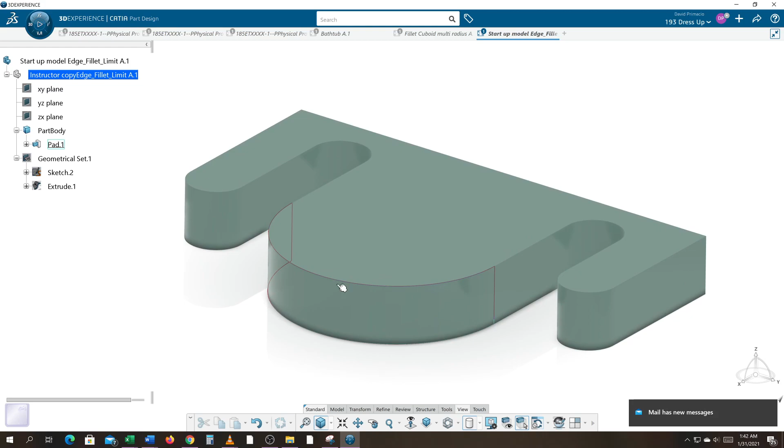So we've got a startup model already. Did you try to pull everything out of hide? Always expand your tree so you can see everything. Now this surface is right there—it's been hidden from you to see if you can figure out how to get that fillet to trim to that surface. But before I do that...

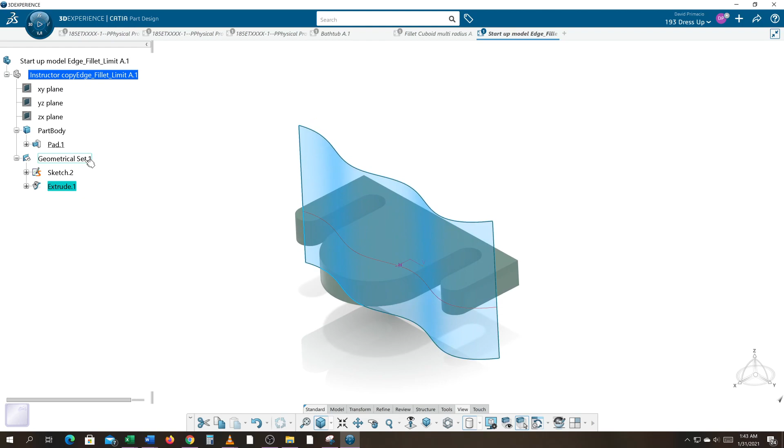I'm going to do some holes. So under model we have the hole feature. I'm going to select this edge out here and then this face. Anywhere on that face it'll snap it concentric to that edge, meaning it will share the same center point.

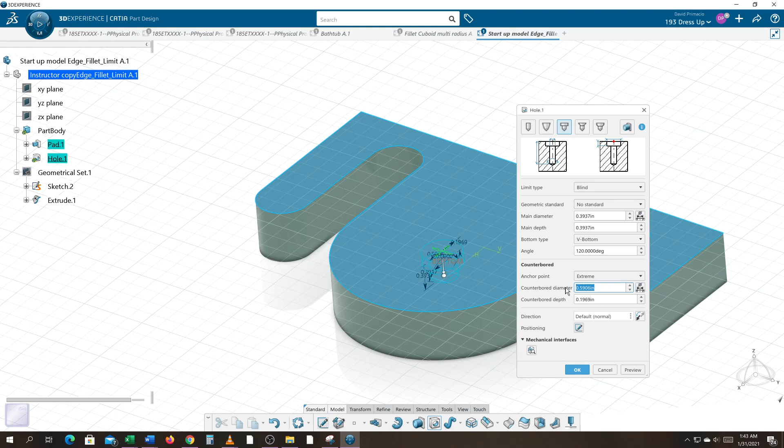I'm going to use counterbore to do a spot face, and we'll make the main diameter 1 inch. The counterbore—I went too big. Oh, the counterbore's got to be bigger first. Let's go 2 and just see how big that is. Yeah, that's good enough, and 1, just so we can see what's going on here.

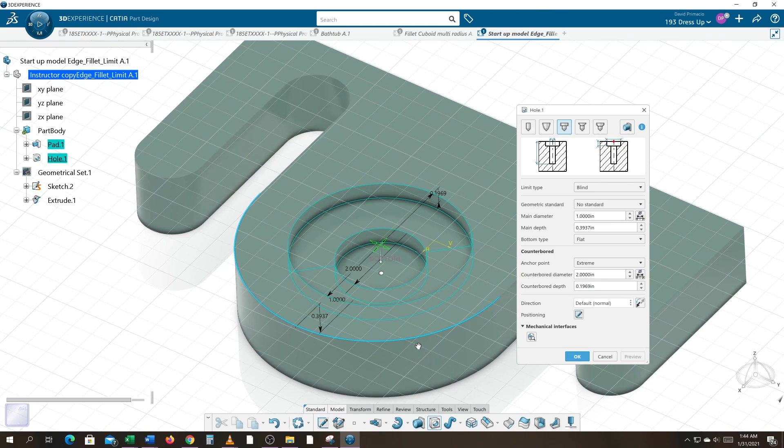Alright, so that hole has a V in it because we have it set to V bottom, and we're going to change it to a flat bottom. Preview that. Okay, I just made that so it would be easier to see that hole. I'll come up with a different color just to make that a little easier to see.

Okay, so you have the counterbore, which is the outside diameter, and then the through hole here. And again, to make concentric holes, you use the hole command.

Grab this edge that's closest to the face, and then grab anywhere on that face. It'll snap it to go concentric. It remembers the last parameter, so we're going to have to go quite a bit smaller.

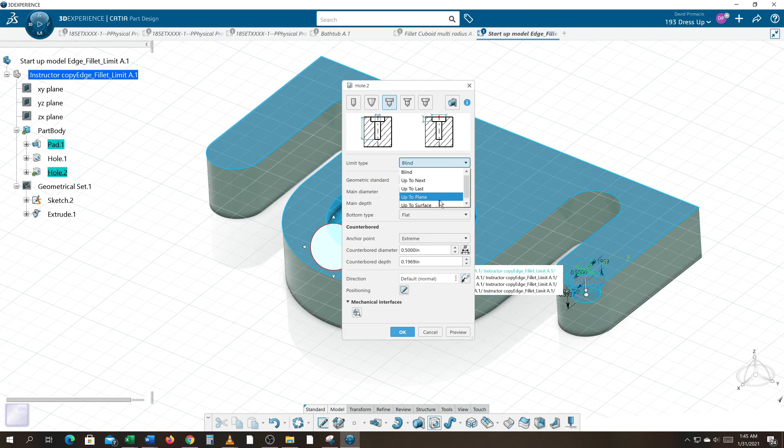Let's try a 1/2 inch—and that's still going to be too big. How about 3/8? And how about a 1/2 inch here? And we'll go through. So we say up to last, and that drills that hole all the way through.

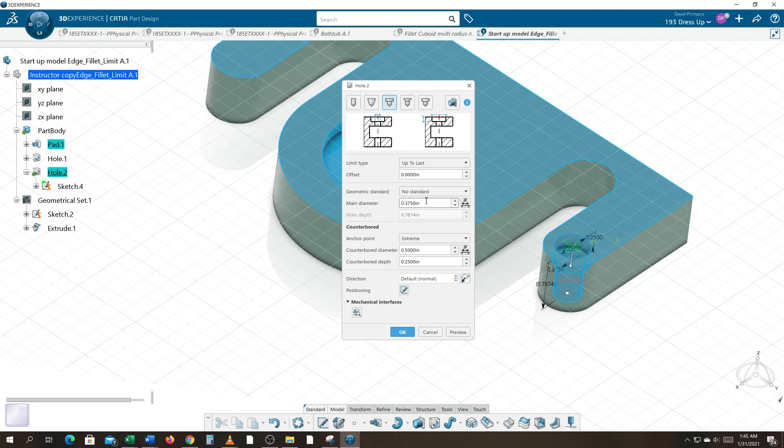What the heck did I do? Let's double click that hole. Counterbore depth—let's go 0.25, and we're doing it up to last.

So that's what your counterbore is going to look like. Probably got a better visual of it sitting there with it highlighted. So that's what your counterbore looks like. Maybe I can sneak this up.

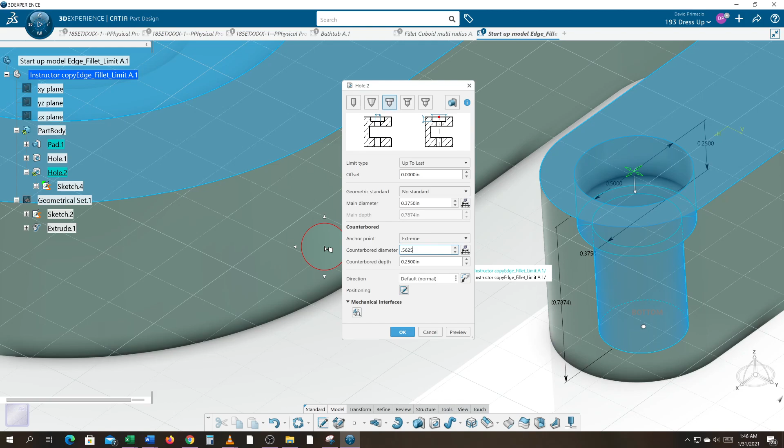Let's try 9/16—0.5625. Preview that, select OK. And there's your counterbore hole versus the countersunk hole.

Again, using this circle and grabbing the edge on the front, not the face but the edge, anywhere on this face will automatically find the concentricity of that arc I chose, and we will use countersunk this time.

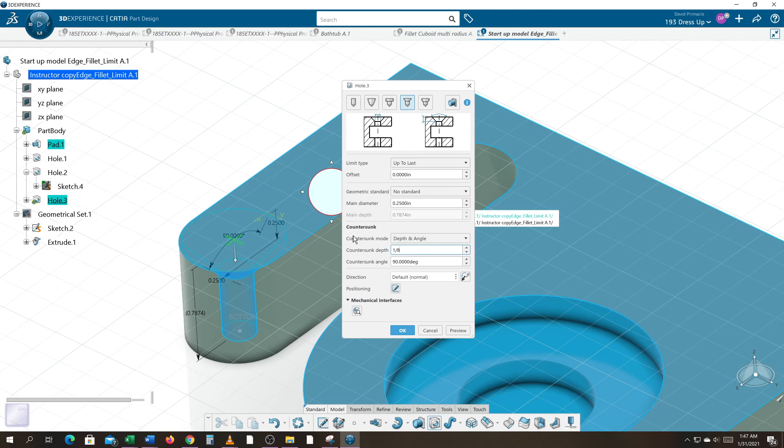Under the countersunk, might have to change that a little bit. Let's do a main hole of 1/4 inch, and maybe not so deep—we'll go 1/8 of an inch deep. Preview that, and there's your countersunk hole. Select OK.

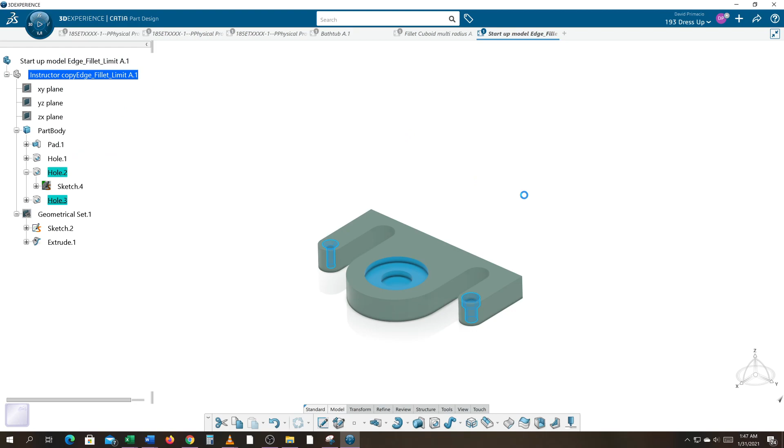And let's make all the holes a different color for visualization here.

Okay, so creating this spot face is kind of deep. Let's maybe change that depth to 1/32.

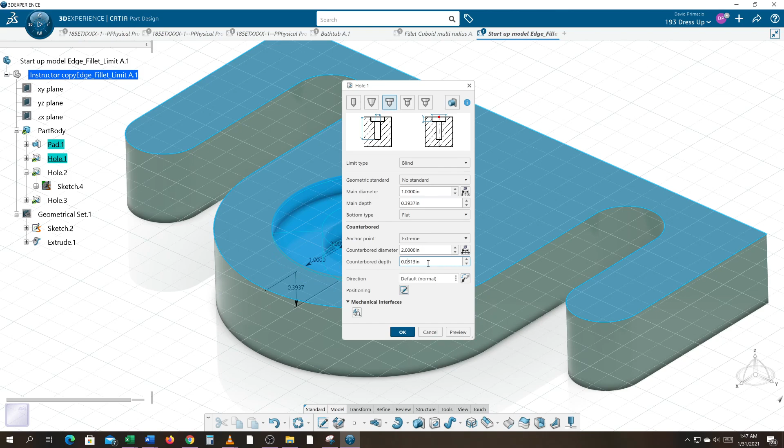Alright, so those are examples of how you can create some counterbore and countersunk holes. And now for the grand finale, the fillets.

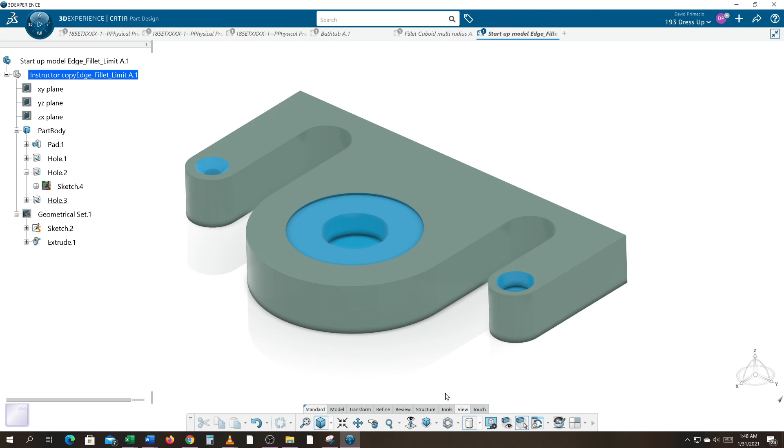Under View, Fillets—or sorry, Refine Fillets. If I select this top edge and hit Preview, let's go 0.1875 and hit Tab. If I preview that...

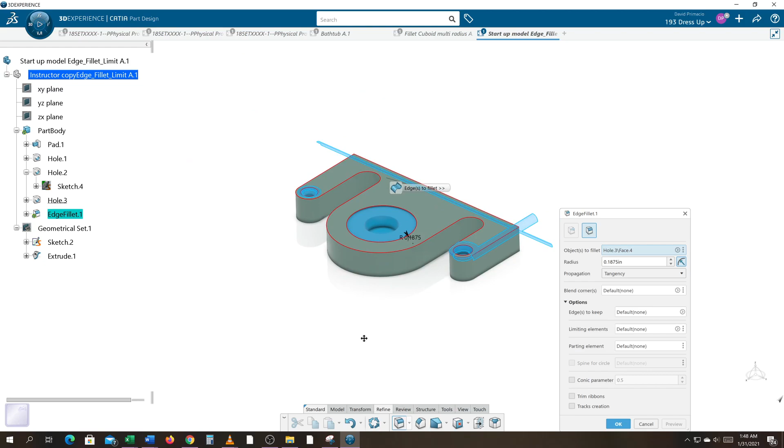It's kind of hard to see what's going to happen. I'll just say OK, and it's not going to like it because it's trying to do a fillet on every edge. I must have had the face chosen. So as it says right here, the whole face has been chosen.

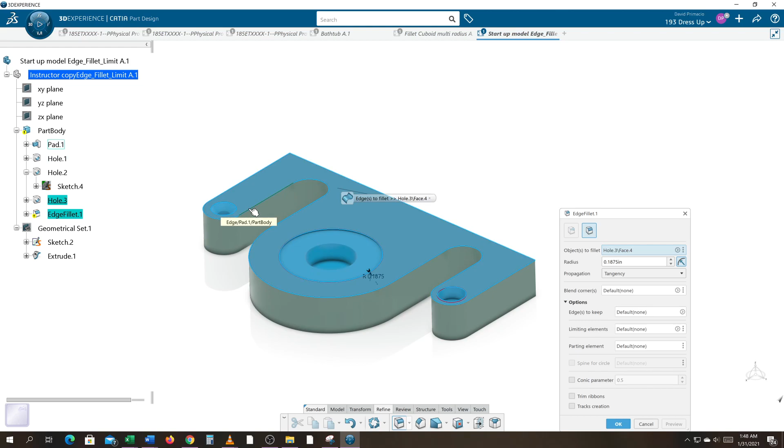So I don't really want that whole face because you're trying to put fillets on these edges as well, and if there's not enough room, it's going to zero itself out. So let's click on here and see if I can just get the edge instead to replace that. It looks like it's still got the inside. Let's hit the triple dot and clear the selection and see if I can't get just the edge of that.

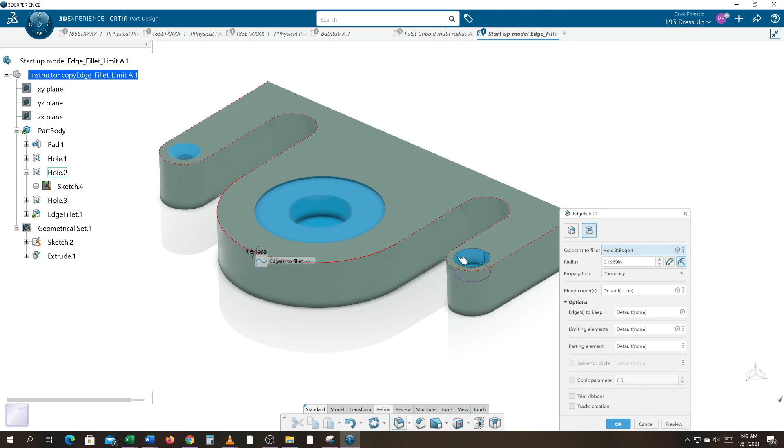And then I'll go, instead of tangent—oh, I'm looking for point. Nope, I don't want that. Try this again. Okay, now it's still—I gotta get this small because this is gonna hit, and that's what it's gonna do there. I could say okay just so you could look at it here. Of course.

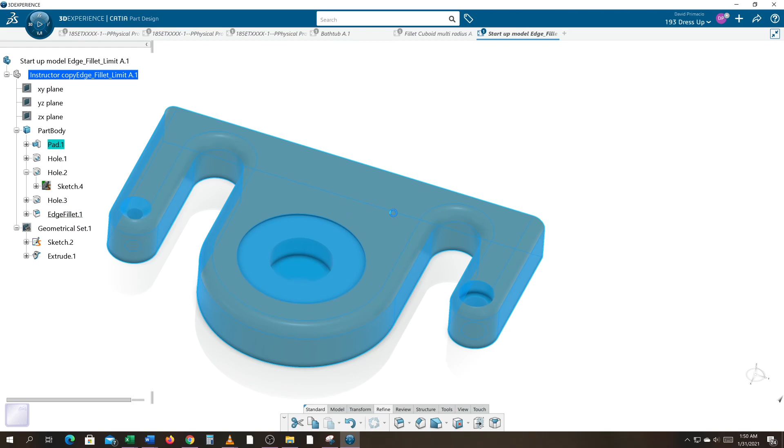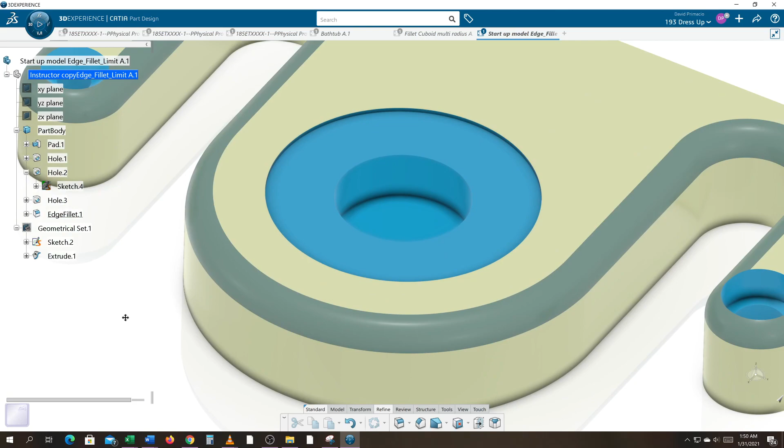Okay, so there's your fillets. See how it worked its way around that counterbore hole, same with the countersunk hole on the other side. All right.

Now the reason why the back edge didn't get filleted is if I double click the fillet, it's set to tangent. The curves and lines are all tangent until it gets to this point here and this point over here—they're no longer tangent, so it won't fillet that edge.

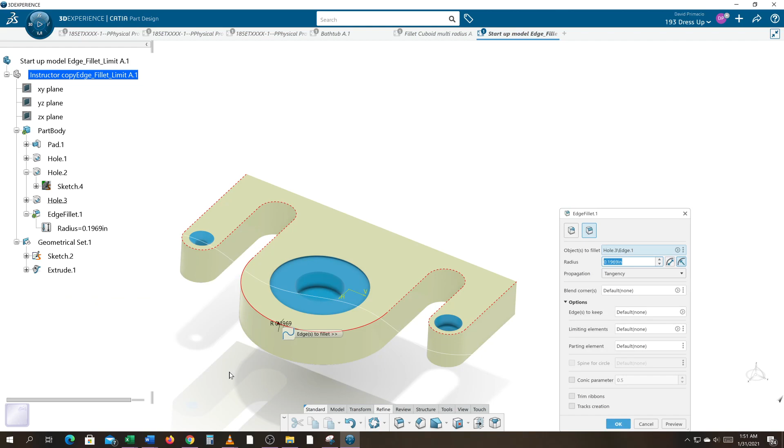Now let's try and do something here. You see where it says limiting elements? I could pull my surfaces out of hide, and I don't even have to, honestly.

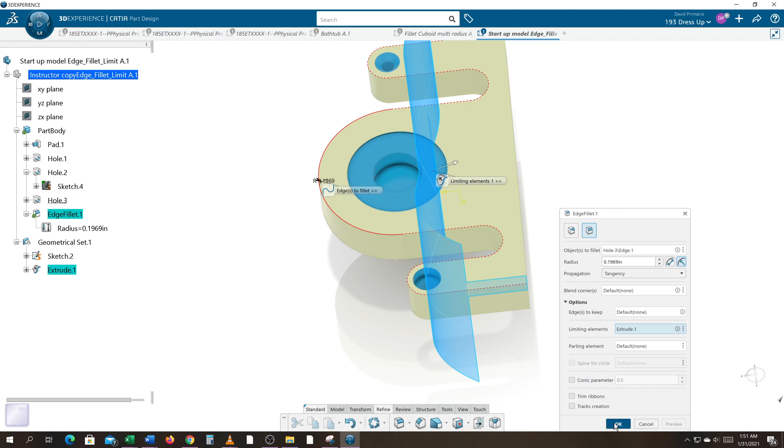You just picked it—I'm going to grab that surface, and if I hit preview, I grabbed this front edge, so on this arrow pointing that way, it's confused because there must not be something here causing some kind of issue there.

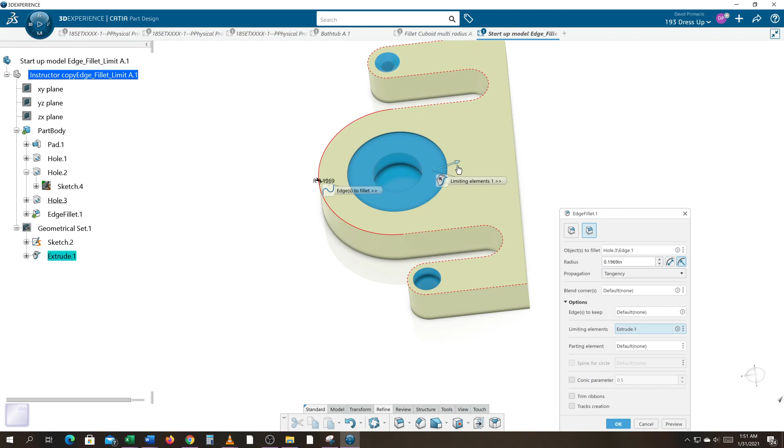So let's undo that. Let's go back to the edge fillet, and under limiting elements I'll select the surface, and I'll reverse the arrow this time and hit preview, and I'll select OK.

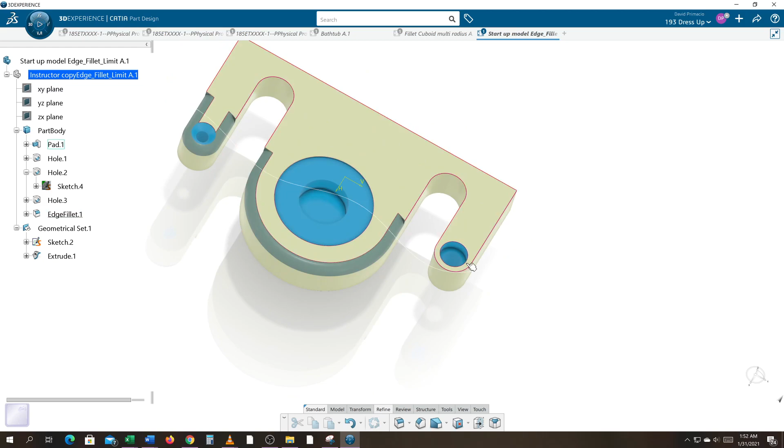Alright, let's take a look at that surface. Alright, so sometimes it doesn't catch this other end—it just limited itself. When I grab this front edge, it makes sense that it limits it here and limits it here, but sometimes it'll come in and grab this, and sometimes it won't. See how it didn't on this side, which wouldn't be a big deal if I wanted to do this.

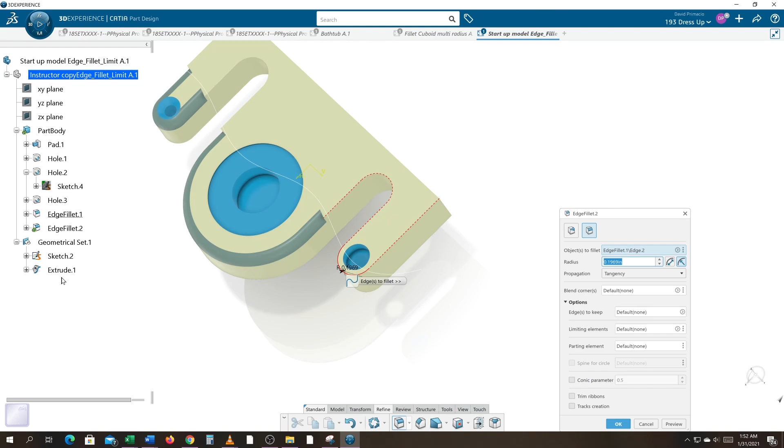I could go to fillet and grab this front edge. No, no, no—I gotta grab just that edge, and then again if I use the limit, that same surface, and invert the arrow so I keep this side of it, select OK.

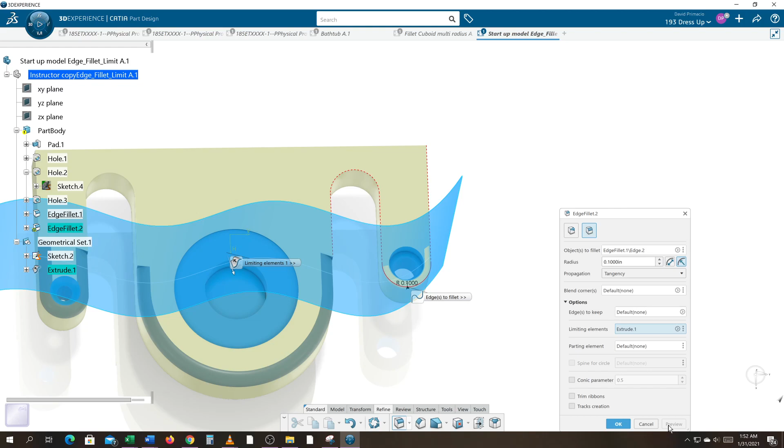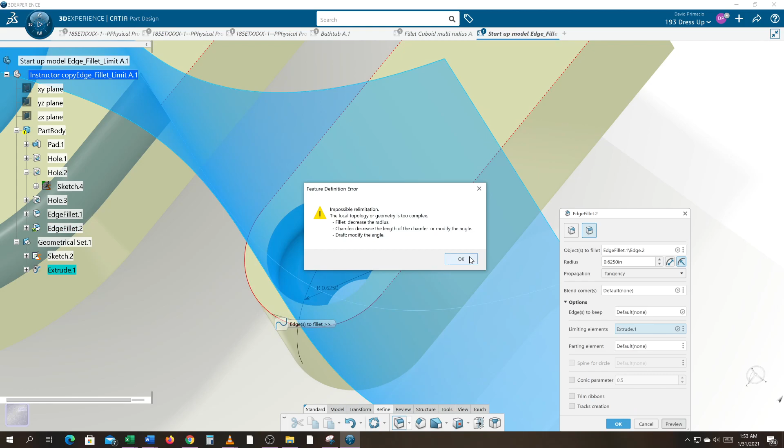I think my radius might be too big. Let's go down to 0.1 and hit preview. It was not liking that—it didn't know what to do with the limits and wrapping around this counterbore. I'm just going to make it a little bit smaller. Oh, really? Actually, I don't know why that wouldn't work.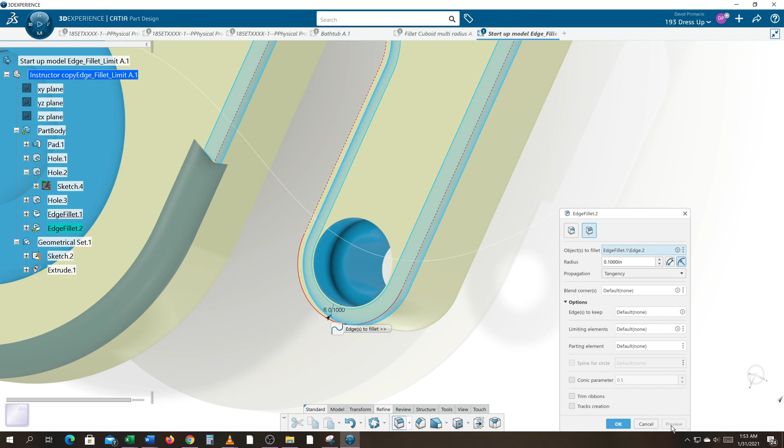Edge fillet—grab this edge. Let's go 0.1, preview that. And then limit that to this surface. Invert the arrow. Preview that. Let's say OK.

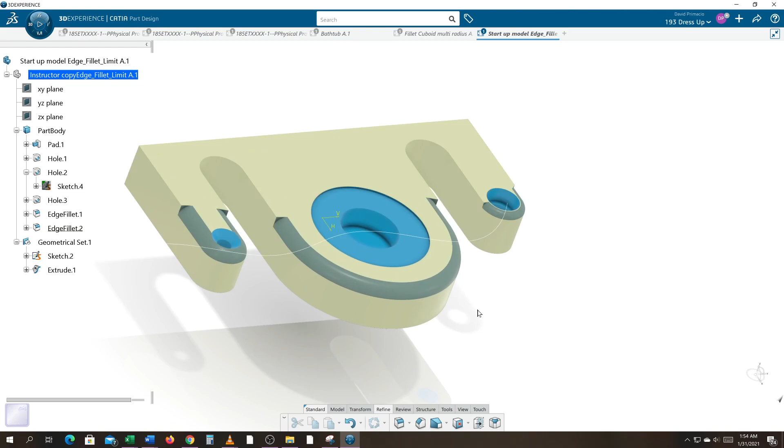Alright, so the point of that exercise was to show you how to put in the countersunk holes and get a surface to limit a fillet. And that's what we did—we got that fillet to stop where it intersected with this surface here. Okay, go ahead and give that a shot.